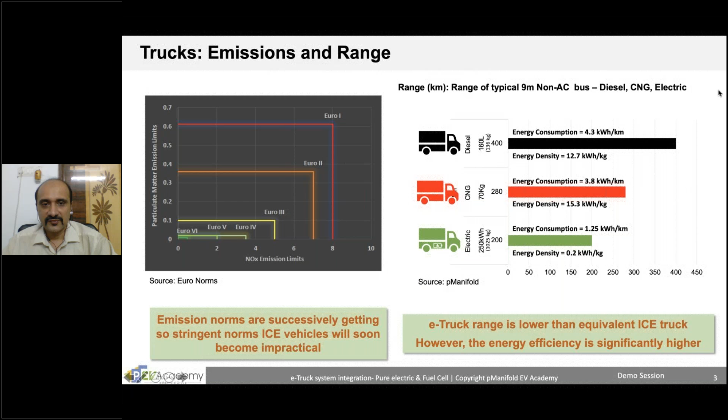Sure, sure, sure. So hello all, thanks Rahul for the introduction. So we have the motivation in terms of why this course, but also why e-truck. That is also important to understand, which further makes us confident on e-truck as the future alternative.

First of all, the emission norms are successively getting stringent. We all know the climate pressures are there, they are real, and they need drastic actions. You can see on the left hand side graph how the emission regulations, the Euro emission norms, have evolved, and they are not evolving linearly, they are evolving exponentially, to the level that we can't even see the box of Euro 6, which is the current norm, and we are soon to expect Euro 7.

So it is going to be more and more infeasible to have IC engine vehicles. Another thing to note here is every time these emission norms get stringent, there is a cost associated with meeting them, which gets added to the product cost. So while we talk about the disparity in costs between electric vehicles and electric trucks versus IC engine trucks, it is not only that electric trucks are getting cheaper because batteries are getting cheaper every day, but IC engine trucks are expected to successively get costlier because of the technology addition required to meet these emission norms.

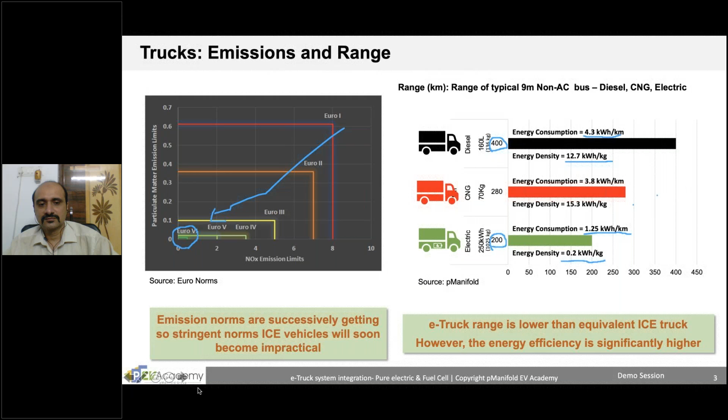So not only are the tailpipe emissions in terms of harmful gases getting stringent, but many countries in the West already have what we call CAFE norms. So they are targeting CO2 emissions. So when we talk about IC engine efficiency and reducing emissions, what happens is you are actually converting everything into CO2.

You have CO, carbon monoxide, or unburnt carbon, which is soot. Those are being converted into CO2 in the catalytic converter. What is coming out of the engine is being converted to CO2 in the catalytic converter. So CO2 is something you cannot escape emitting in an IC engine, whatever you do. That is the product of combustion. Because you are burning hydrocarbon, you are going to get CO2 and H2O. There is no getting away from that.

But to reduce that, what is happening is for the same amount of power or energy generated by the engine, you are trying to inject less and less fuel, so that you have less and less CO2 coming out. That's what is targeted by CAFE, Corporate Average Fuel Economy, or CAFC, Corporate Average Fuel Consumption, or CO2 strategies. Europe and even India are going to CO2 strategy. So you have to reduce the CO2, or in turn reduce the fuel consumed for every kilometer you run. So there are these norms coming up even in developing countries now.

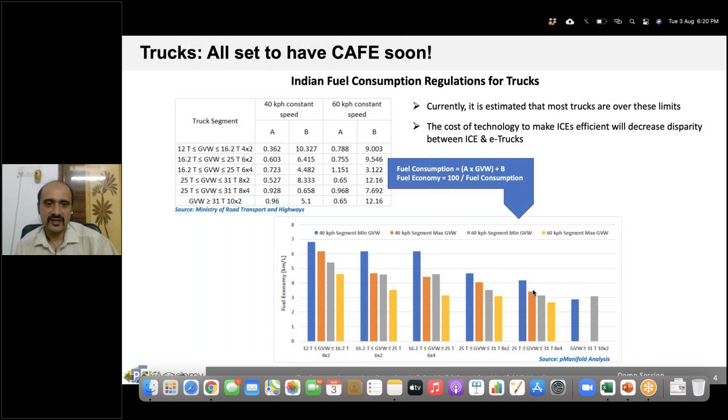This is an example of a recent notification in India by the Ministry of Road Transport and Highways, where they have proposed maximum fuel consumption limits for each class of truck, from intermediate and light trucks going up to medium and heavy duty trucks. You can see the truck segments showing the gross vehicle weight and their axle configurations. Based on that, these limits have been suggested, and we have interpreted them for you in the bar chart below, where a light truck or intermediate commercial truck cannot have less than 4.5 kmpl at 60 kph, and at 40 kph cannot have less than 6 kmpl.

So this is going to be another challenge for IC engine trucks to meet, and hence electrification is eventually going to come as a solution. These CAFE numbers incidentally are tracked at fleet level, meaning the OEM sales, overall product portfolio. So OEMs are going to come up with electric trucks to at least partially have electrification to meet these CAFE norms, because the electric truck doesn't have any CO2 emission out of the tailpipe.

And I find it interesting to interpret that with higher and higher emission standards, making IC engines will become costlier. And from the economic perspective also, the OEMs, guided by the increasingly stringent CAFE regulations, will be driven more and more towards electrification options of their production and sales.

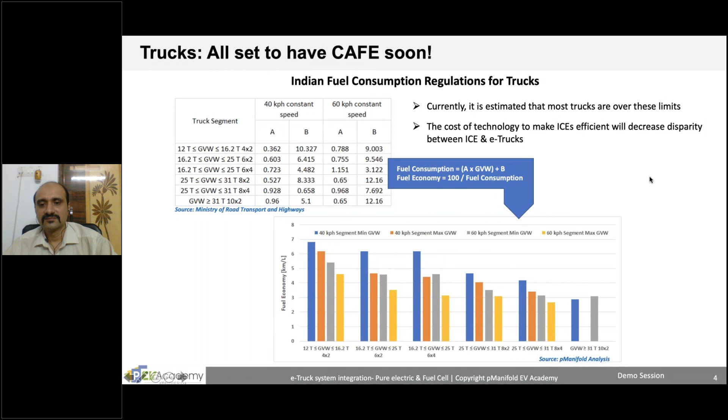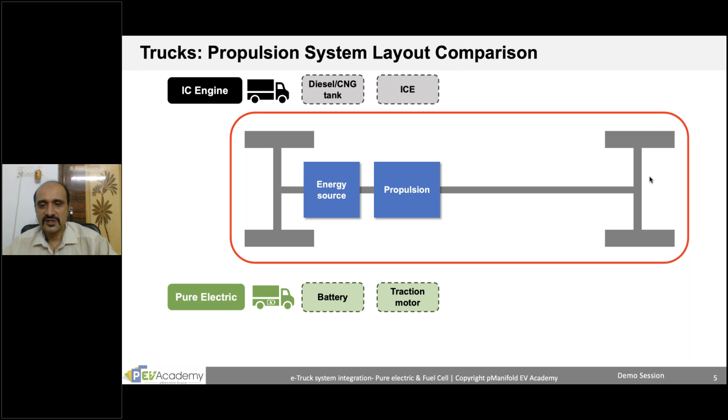So this is a comparison of the propulsion systems employed in the trucks, comparing IC engine and pure electric. We will have another option after we go through this. We have energy source as the fuel tank in IC engine trucks, and in pure electric we have the battery, onboard battery.

Then we have propulsion done by the engine itself in IC engine trucks, whereas the traction motor is what drives the wheels of a pure electric truck.

Then we have speed and load control, which is done by the engine management system, an electronic controller, in IC engine trucks. In pure electric as well, it's an electronic controller, often a vehicle controller or battery management system, which will try to optimize where you run. However, one good thing about electric motors is you have a much wider band of good efficiency zones compared to IC engines, so it's much easier for the controller to optimize the performance of a pure electric truck compared to an IC engine truck.

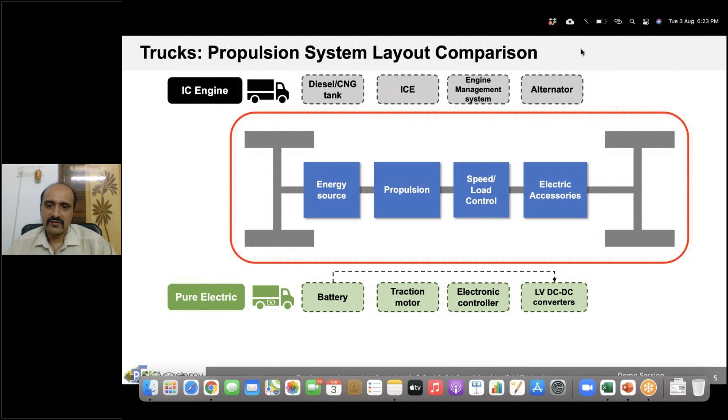Then you have the alternator, which generates electricity on an IC engine truck to power electrical devices or charge the battery. So you have blowers, cooling fans, illumination, infotainment, and all that. All the tracking systems are powered by that. Sometimes you also have...

...onboard cooling. The cabin is cooled in the trucks, or the cargo could also be cooled for perishables, for example. So all of that will be powered by battery in pure electric vehicles, whereas in IC engine vehicles, the refrigeration or the compressors required in refrigeration or air conditioning are powered by the engine directly.

So here you have more leeway to optimize the accessory loads by running them with dedicated motors which are not linked to the traction motor. In the case of IC engines, it is linked to the IC engine, so the IC engine will run at the speed and load defined by the vehicle operation and not by the demands of the accessories, and this puts stress on the IC engine and lowers its efficiency further.

Whereas in pure electric, you can actually have optimum efficiencies, isolated or decoupled in terms of propulsion as well as in terms of running the accessories.

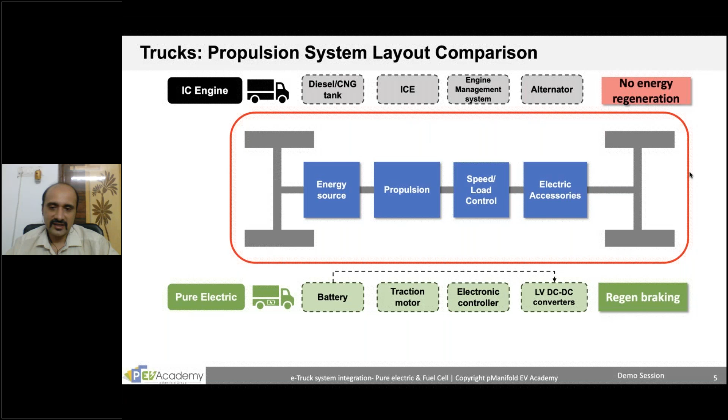So I think one thing I was discussing with a couple of people, kind of asking this question, which should come first, like with our advancements on the electric EV side, but lesser on the trucks and more on the buses. Does the bus architecture provide us a good pathway to deepen the same penetration on pure electric trucks? So that is a question.

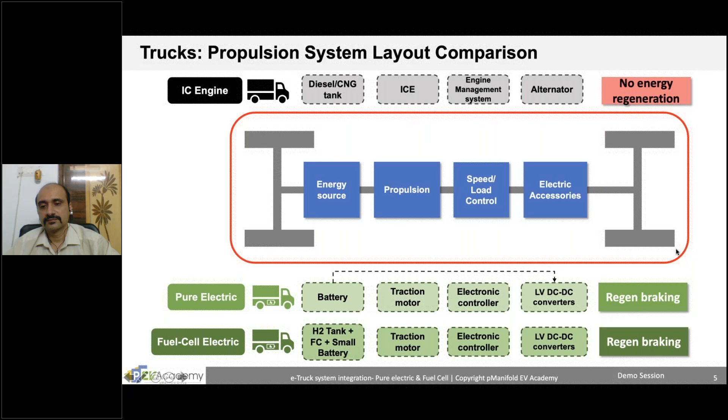Now how do we add all of these subsystems that are part of electric vehicles as well as fuel cell electric vehicles? How do we add these? How do we size these? How do we select these?

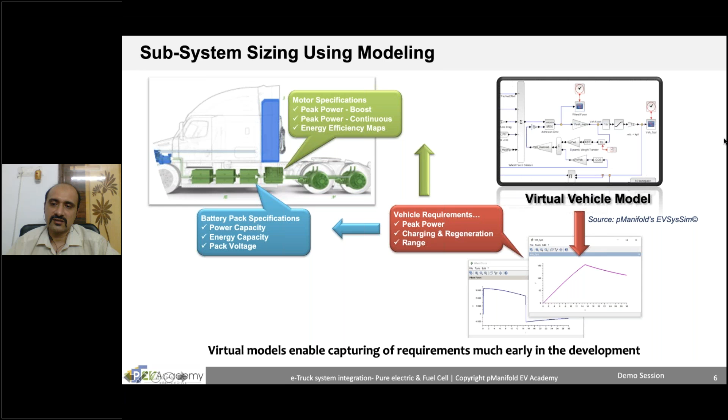When you start from scratch, as is the case in a lot of countries where you have few or no electric trucks available as of now—usually in IC engines we've reached maturity where we're only doing differential change, but here the change is a big one—there's a good opportunity to use virtual models in development of these products. We'll see the benefits of virtual models in subsequent slides, but what you can do is treat these as virtual prototypes and understand the requirements from the vehicle down to the subsystem.

That helps you size these subsystems to greater accuracy. You can do trade-offs with data generated through the virtual models, and drive a pretty close to final selection as well as sizing for motor and battery packs. And for fuel cell, you can optimize the onboard energy split between the battery pack and the hydrogen storage or hydrogen tank, using the fuel cell as the intermediary. All these sizing aspects are covered in the course, so you understand at the integration level and system level how to affect these sizings, how to influence them, and how to link them to the vehicle requirements for each application, each segment of the truck.

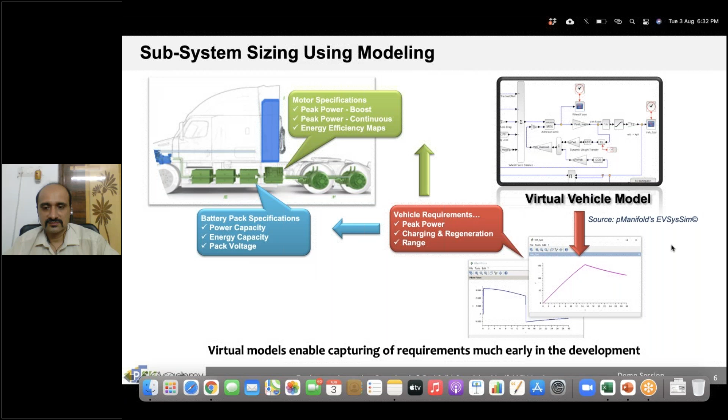This is a case study from our consulting work—a feasibility study for e-trucks for a particular application. We'll go through this generic process during the program, at each stage what is to be done, and in what sequence you should do this planning for product development—starting right from what is the IC engine fleet catering to that application, what kind of IC engine vehicles or trucks are currently doing that job.

Can there be a one-on-one replacement? If not, what is the best advantageous replacement strategy where you cater to the need with fewer electric trucks? Because electric trucks as of now are costlier than IC engine trucks, so if you can reduce the number of trucks needed with electric trucks, it can provide some relief in terms of overall fleet cost.

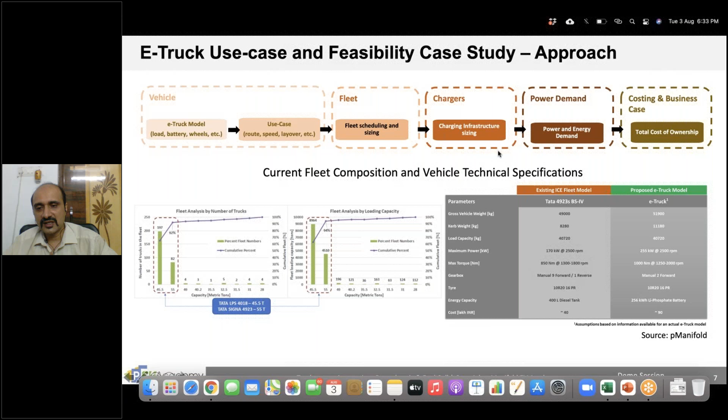Now, how to bring virtual modeling into this. You can map real-world use cases, like we've done here, collecting the duty cycle data—speed versus time, so at what time you have what speed—as well as distance versus grade, which is the terrain the trucks are operating in. Using these two data points, we can run an overall e-truck simulation.

This gives us the energy consumption, the power demand of the motor, and the range you can expect in the real world. Oftentimes the range quoted in specifications is the certification range, and certification, as we saw, is done under very ideal conditions—40 kph constant, 60 kph constant. Those are not the conditions in which trucks actually run, as you'd be aware.

So doing these real world duty cycles, how to use those, and estimate real world range for a particular application with a particular loading pattern on a particular terrain. Using these, you can then do a meaningful total cost of ownership comparison with ICE fleet, because oftentimes if the energy consumption numbers aren't real world, computed from certified range and certified fuel economy numbers, it can be quite misleading. This will be a more fair and practical comparison using these processes we will go through in our training.

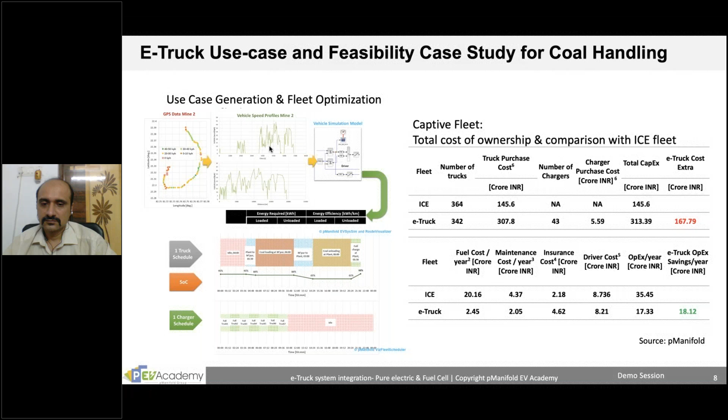So this is about total cost of ownership. This is one of the metrics after understanding the technical feasibility we looked into in the previous slide. Then we look into the performance from a total life cycle perspective defined by total cost of ownership, which includes all the different capital costs and operational costs.

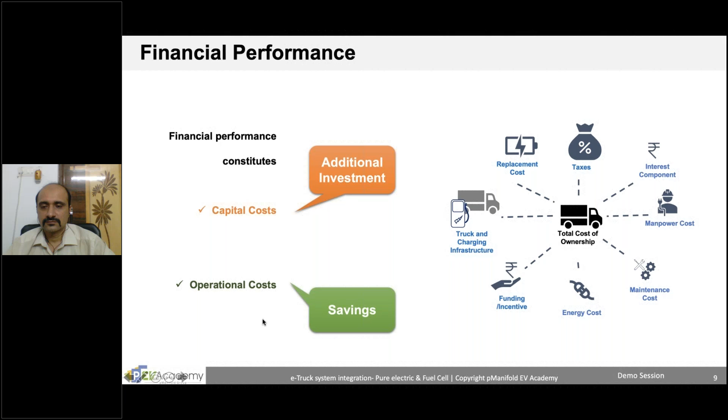And again, because you will be studying both hydrogen as well as pure electric, we'll be developing very detailed TCO models, not just theoretical, but driven through practical applications, bringing all the technicalities from the previous simulations and models into your TCO assumptions, so that they are very close to ground reality. That is important, because that is the number basis on which we intend to take decisions on overall feasibility and scale-ups.

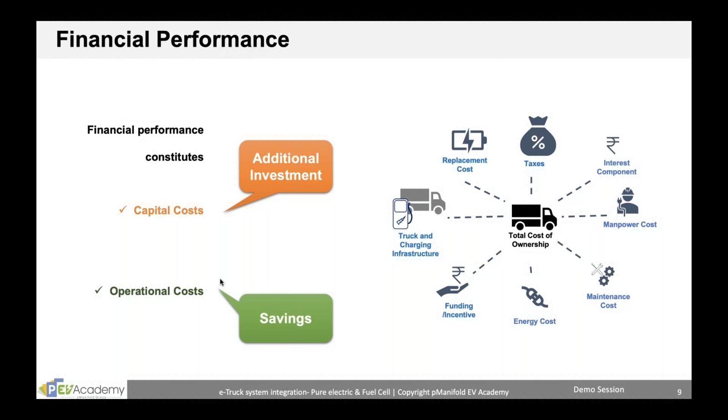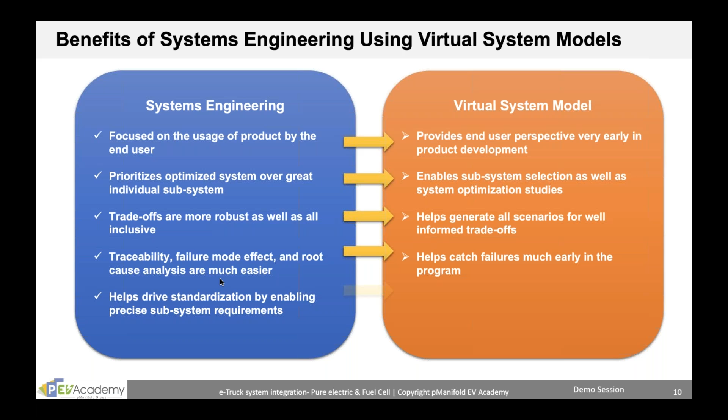Vikrant, you want to add any quick points here? Yeah, so the approach of systems engineering - the advantage you get is focus on the usage of the product rather than the product itself. You may design the best truck, but unless it has an application which eases the life of the end user, you will not get any takers.

Prioritizing the optimization of the system over great individual parts. You do not sell motors and batteries, right? You can have the best motor, but if it is coupled with an incapable battery, you do not unleash the motor's full potential, and vice versa. Then the trade-offs you do are robust because they are inclusive, since you are always thinking of the system, not how my particular subsystem performs best.

Then there is traceability in terms of failure modes, traceability in terms of root causes. There can even be good system level preventive maintenance, or setting up system prognostics. Nowadays you have connected vehicles where you have access to the vehicle running data live, monitoring them and averting breakdowns. And it also helps drive standardization by enabling a precise subsystem requirement.

So when you have the precise subsystem requirement, and there is an aggregation of these requirements across platforms, it helps you do a much better job, which you already see in IC engines, where the same engine caters to a wide variety of segments. Starting from 25 tons all the way to 60 tons, you have the same engine doing the job with minor modifications in terms of the fuel mapping, the EMS map calibration, the drivetrain ratio, and the fuel tank capacities.

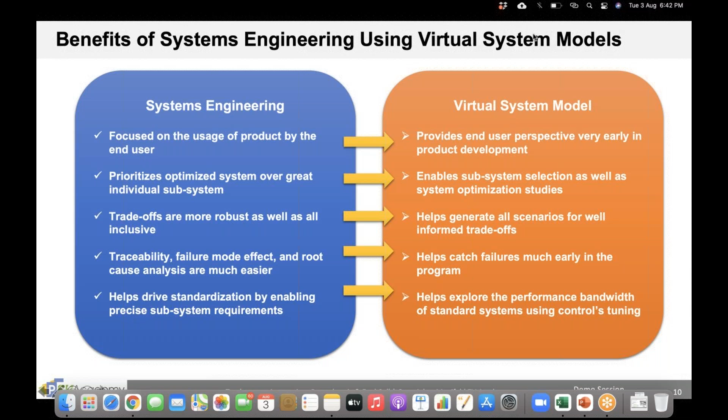Here we have listed down. Vikrant, is my voice echoing? No, okay.

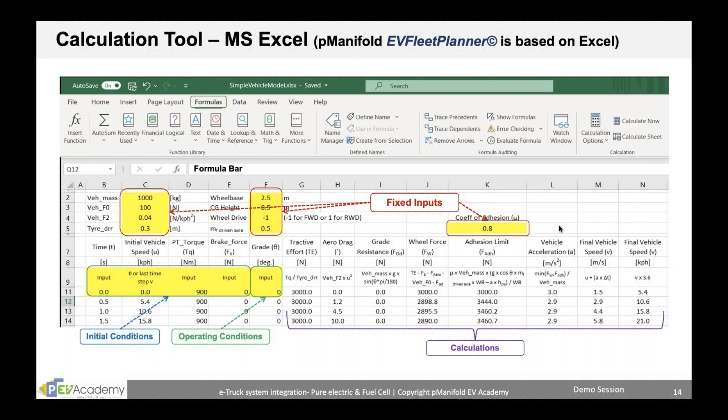I myself worked in MATLAB Simulink for a long time. Even Rahul has worked extensively in MATLAB Simulink, and we find it almost same. So if you learn through Scilab, it also gives you the opportunity to understand how dynamic modeling is done in MATLAB Simulink. The reason we are using Scilab is because it's a freeware and doesn't have any license restrictions.

You can still create your own IP, your own models, your own libraries without having to sacrifice confidentiality or your IP. So Scilab is the choice. However, if you already have access to MATLAB Simulink and want to use that, no issues.

You can use that. We will be more than happy and capable to address your questions in terms of modeling, even in MATLAB Simulink.

So I think this is what we have to share as part of today's session. We would really love to interact more with you to understand what kind of questions you would have, and we look forward to having you in our 17th August starting batch for electric trucks integration, covering pure electric and hydrogen options. So questions, if any, please share over the chat window.